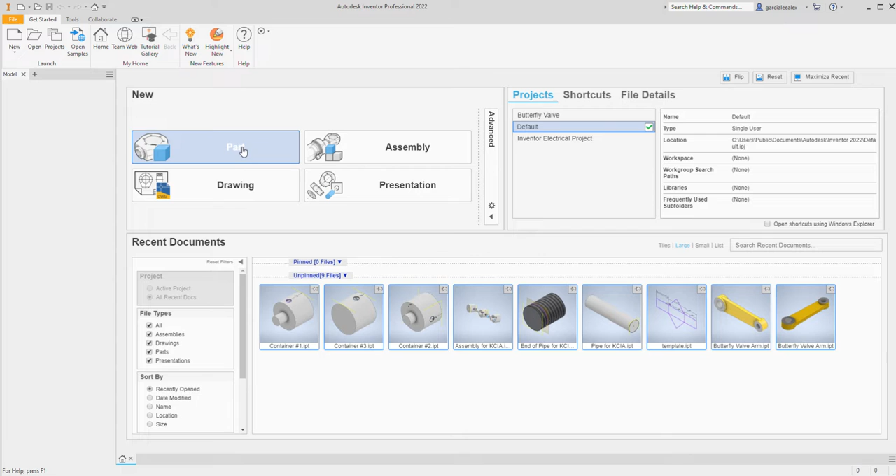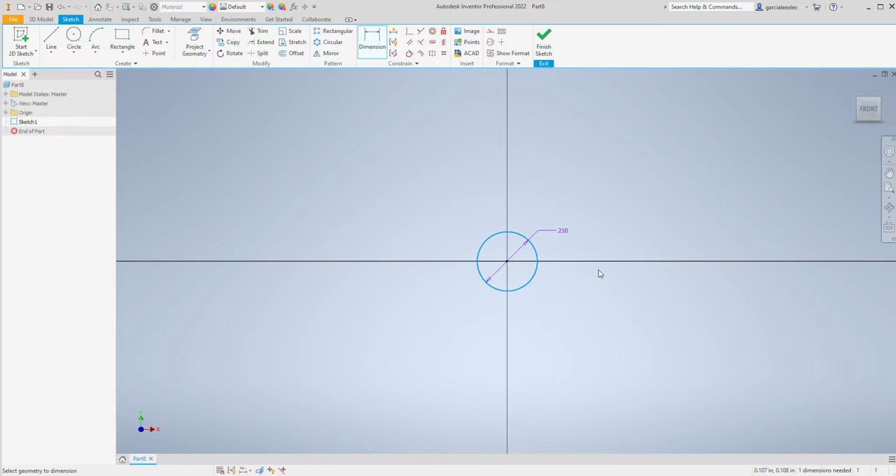We're going to go to Sketch, start a 2D sketch, select the X,Y plane, and make 3 different circles. The first circle: right click, go to Dimension Type, set it as radius, and put it as 1.29 millimeters.

Then the second circle, do the same thing: right click, dimension type, set it as radius, and put this as 1.52 millimeters.

And again, the third circle. Right click, dimension type, radius, set it as 1.67 millimeters.

Then we're going to do 3 different lines: one going on the left, one going down the middle making sure it goes through all the circles, not just past 1 or 2, and one on the right.

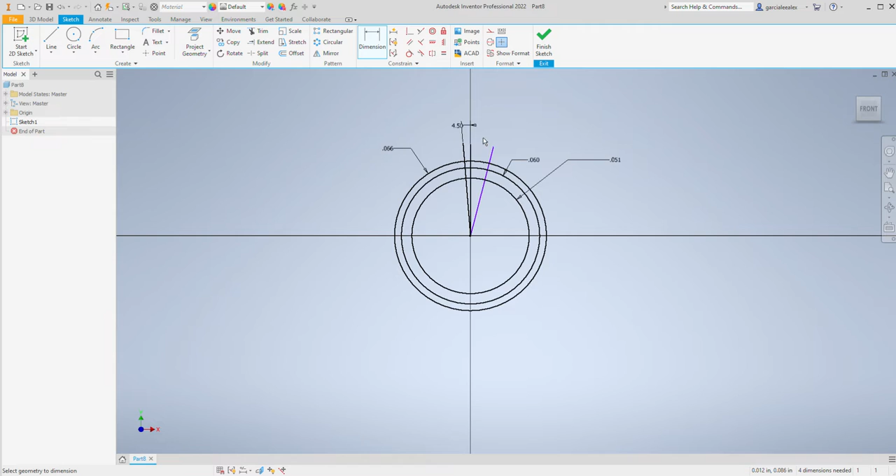Then dimension the 2 outer angles. Take the first left one, doesn't matter if left or right, put the angle as 4.5, and between these outer angles put it as 9. So it looks like this. Then put these lines into construction.

Then we're going to add in an arc. The arc can be anywhere out here as long as it's outside of the third circle and connected to the second circle and that outer line. It doesn't have to be an exact distance. Same thing over here, making sure it's on the same - it doesn't have to be the same height or anything.

Just do the same thing, put an arc. Doesn't matter how you put it.

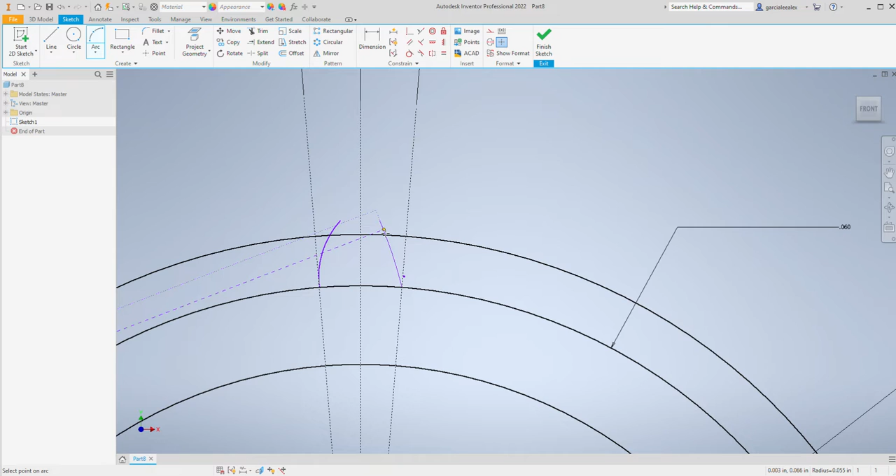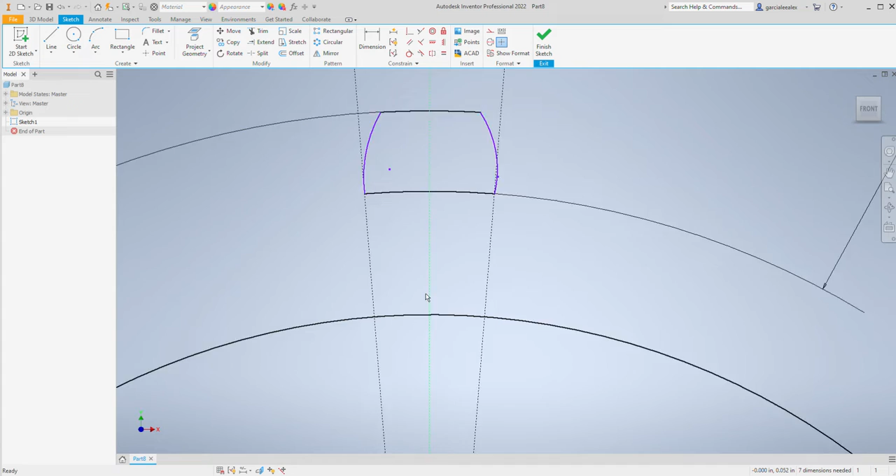Then select the trim tool. Trim the top of these arcs and this inner one and the outside. Same thing on this side, so it looks like this. You're also going to want to trim this here, so it looks like this - basically get rid of the third and second circle, but that is a-okay.

Then do the line here. Make sure you have that vertical constraint, doesn't have to be a set distance or anything. Make sure it goes through the first circle you see here, and same thing on the other side.

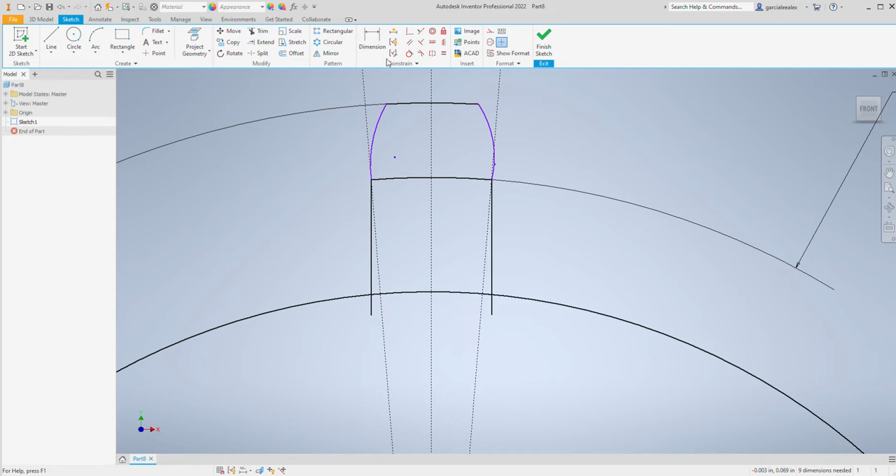Now we're going to work on the top. We want to have the top distance - make sure you have it on the point arc and also on the center line. Set the distance as 0.045 millimeters, and these 2 outer points here, set the distance as 0.09 millimeters.

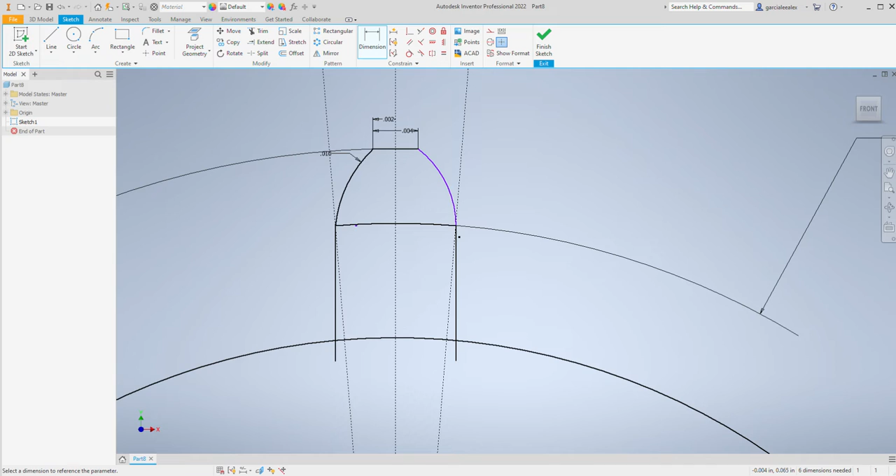Then you're going to do the arc and set it as 0.4 millimeters. Same thing here - you could also click on here just to make it easier. So it looks kind of like this.

Now you want to trim this extra piece of line here, and make this construction, and trim these off here. So it looks like this.

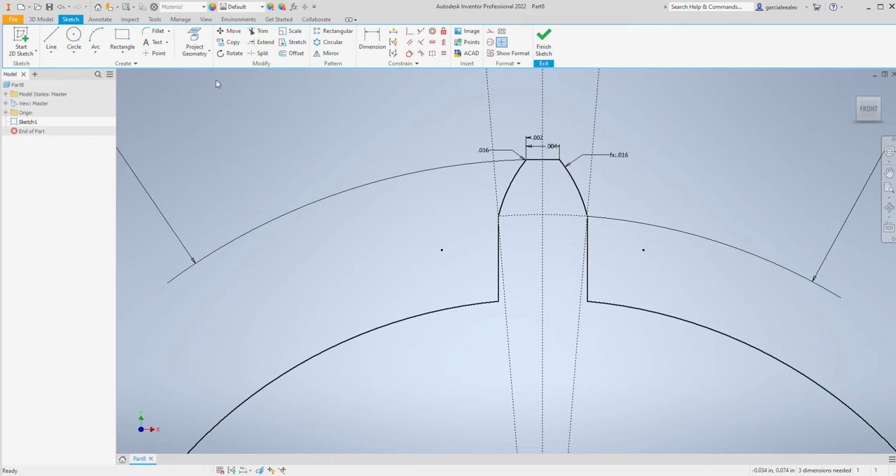Then select the fillet tool as 0.06 millimeters and select these 2 here. So it looks like that in the first one and like that. So it should look kind of like this.

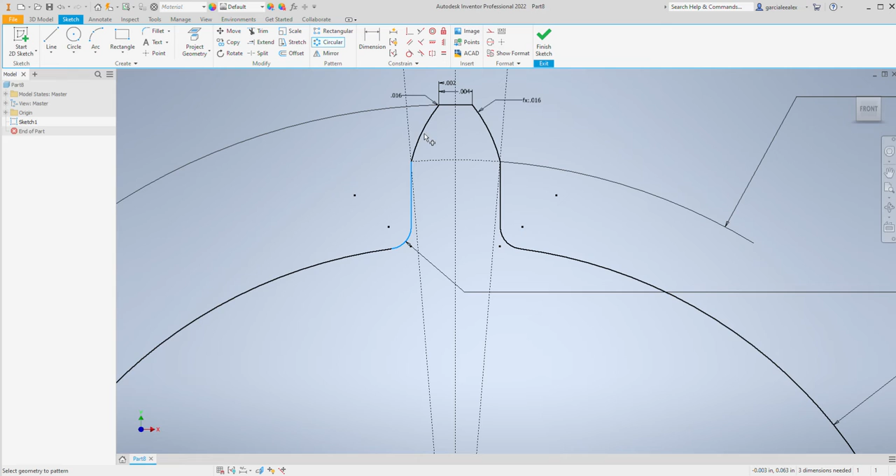Then we're going to do circular pattern. Select the geometry as all these here, making sure not to click anything else. Select the axis, which is going to be the center point of the circle. You can see the preview of the other pieces, and we're going to set the amount as 20. So it looks kind of like this.

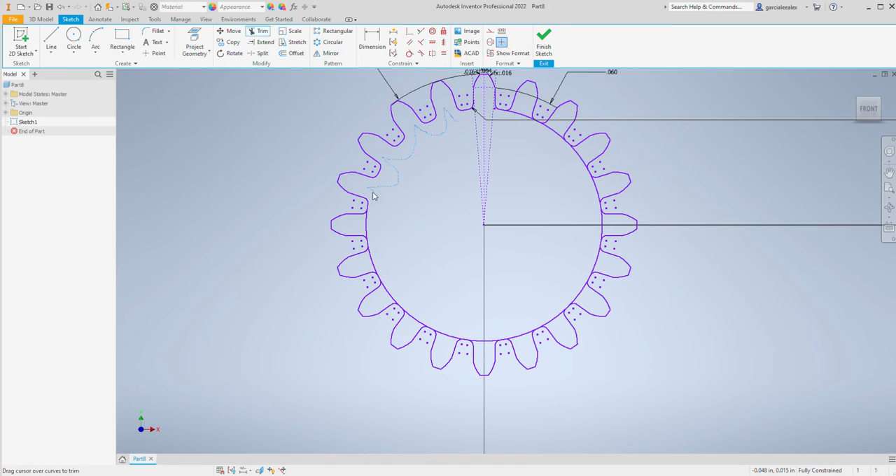Now we're going to do the trim tool, trimming all the extra lines we have here. So it should look something like that.

Now we're going to do another circle. Set the dimension as 1.5 millimeters, making sure it's also in the center - you don't need to do the radius for this one.

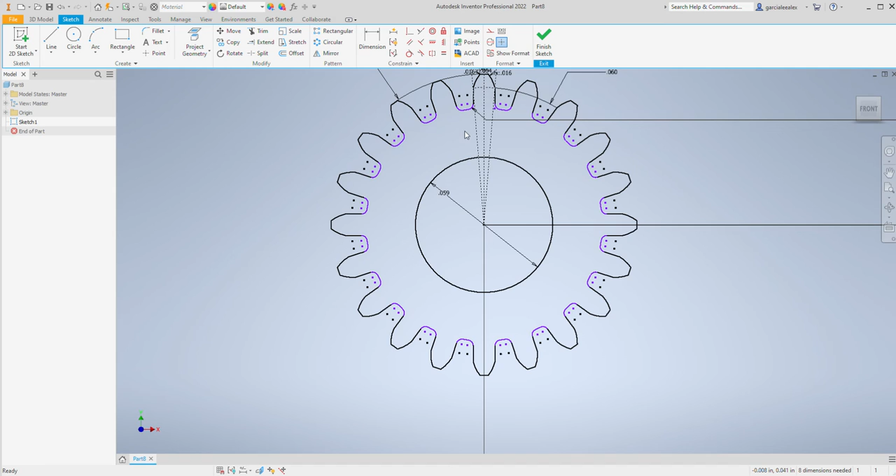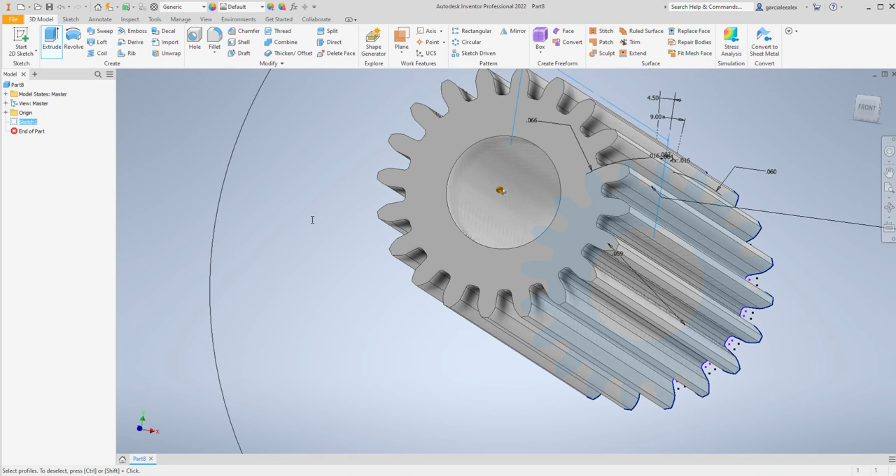Go to Finish Sketch, go to 3D Model, click Extrude, and make sure that this is all green here. Select it, left click it, and set the distance as 0.5 millimeters. It just looks something like this.

So this is your basic gear.